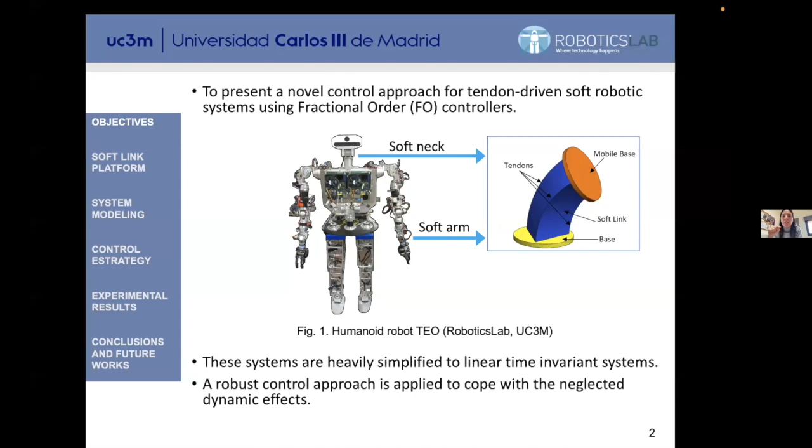So I'm showing you here the evolution of the design, the modeling, and the control of these kinds of joints, right? So the thing is that even if this is a very complex system, we are linearizing it. We are considering it as a linear time invariant system, in order to simplify the model, and then later we will design a very robust control. This is our topic here. And the type of controllers we use are called fractional order controllers. We will see later what they mean, right? So this is the thing.

So what we propose here is this kind of design in which we have clearly an elastic beam that we actuate with the help of 3 tendons, right, connected to motors that we have here in the base. So according to the actuation of the motors, we can change the length of the cables, of the tendons, and it will cause a movement, a change in the orientation and the inclination of the platform. So these elements here that you can see at the tip are to allocate different masses, loads, so that I can measure the robustness of the system when different loads are placed on the tip, right?

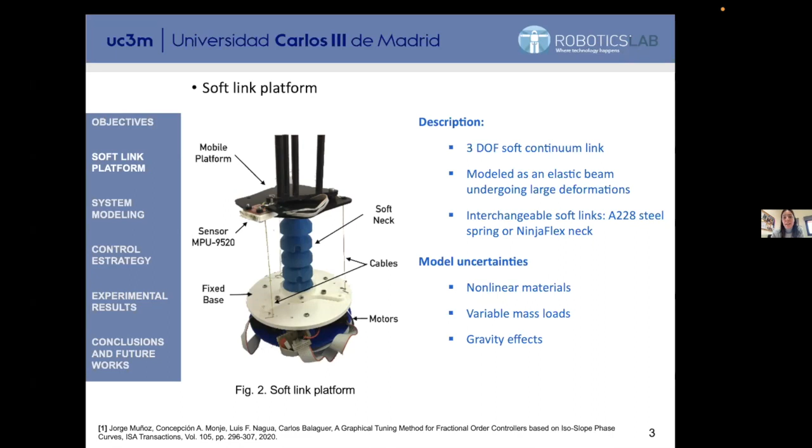This is the idea. So we are working with a 3 degrees of freedom soft continuum link, as you can see here. We, of course, at the very beginning, tried to use steel springs. We forgot about that because they are not really soft. So now we are working with NinjaFlex materials and other materials. Particularly, this prototype is made of, this beam is made of NinjaFlex. And as I told you before, even if the system is non-linear because of the materials, and also because we are adding different loads and we have gravity effects, we are simplifying all this a lot, right? And even if it is a strong simplification, as you will see now, we will see how effective our controllers are, right? And this is the thing we have to remark here.

The control part more than the modeling part. So what we do, just for you to simply understand how we modeled the system, we just simply actuate on one tendon, right, with an input that you can read here, which is a neck inclination. This is a step of inclination for the neck, and this is the input signal to the system. And as output, we measure the neck inclination with a sensor, with an inertia measurement unit, right?

So according to this relationship, output and input, real neck inclination and input inclination, we measure that dynamics and we identify that as a first order system. I understand, I totally agree that this is extremely simple, but this is for us a good thing, because even if the system later is more complex than that, we can demonstrate in practical experiments that the controller works perfectly well, even if it has been tuned for this simple system, right?

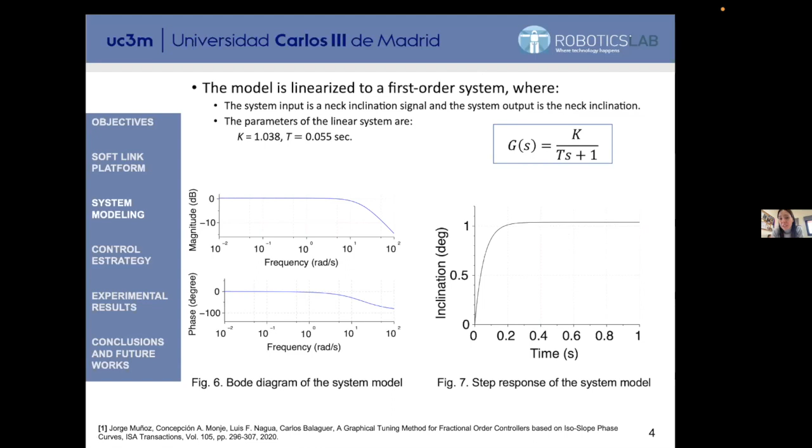We will see. So we identify the system with K and T, a simple first order system, having this Bode diagram in frequency and also this step response. So we can see that for that step of inclination, the neck reaches that particular inclination that we have here, right? So according to this, we design a controller for that simple system. The controller must be robust to certain aspects, mainly changes in the mass of the load. We are using different loads to demonstrate that the controller is able to fulfill stability, but also robustness. And I will describe later what we understand by robustness here, right?

What is the thing here? Of course, if we change the mass at the tip, we are changing the dynamics. This is quite clear, right? But also when the positions of the motors and the pulleys are changed, it implies that the distribution of force and the velocity from the actuators to the soft continuum mechanisms are changing too, right? So we have to take that into account, and also that we are using rapid prototyping here. So we will have some mismatches from one model to the other, right? So we have to design a controller able to face all these mismatches and uncertainties and simplifications we have made.

Right? So for us, we have three main control specifications, as you can read in the slide. First of all, for that neck, which is moving, what I want is for the neck to move at a particular speed, right? Which is a condition that we can fix with the open loop in the frequency domain: the gain crossover frequency, which has to do with the bandwidth of my system, with the speed, and also the phase margin, which also affects the damping of the system, right? So I want it to be that fast. I want this system to be that oscillatory, or with this particular overshoot. These are the two main conditions, right?

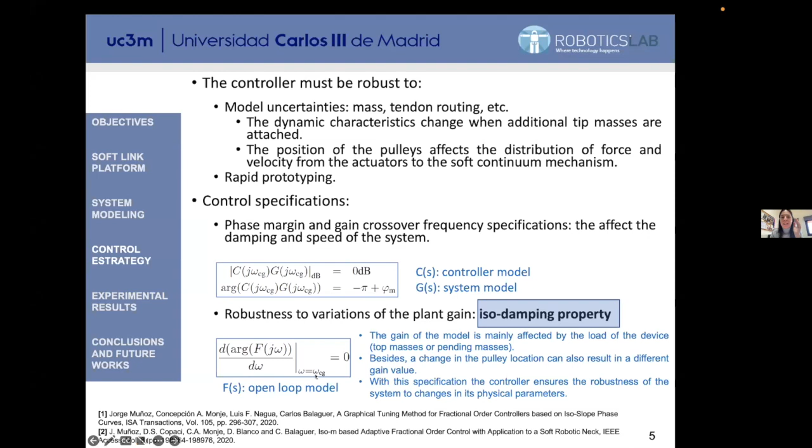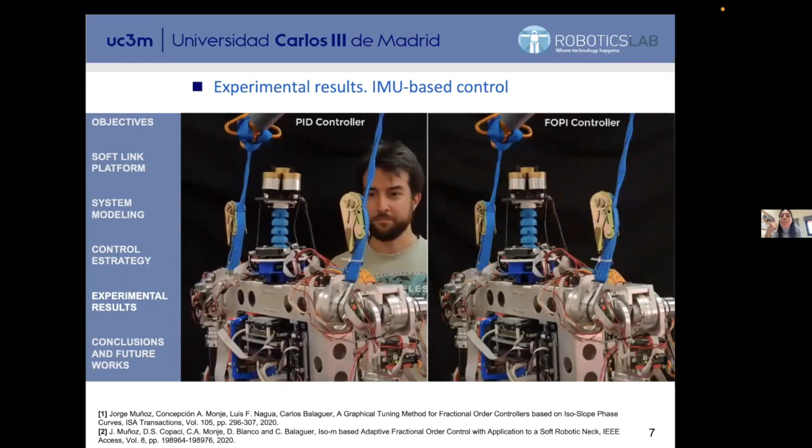So if there is no oscillation, there will not be oscillation for any of the masses I place at the tip. Okay, so here I'm going to cancel a little bit the sound of the video, but at the right you can see how this controller performs. You can see that there are a lot of masses. We have some discs with different masses placed at the head of the robot through the neck. And you can see how the oscillations are totally cancelled, whatever the different mass I place at the tip. And this is the robustness. Of course, we achieved that.

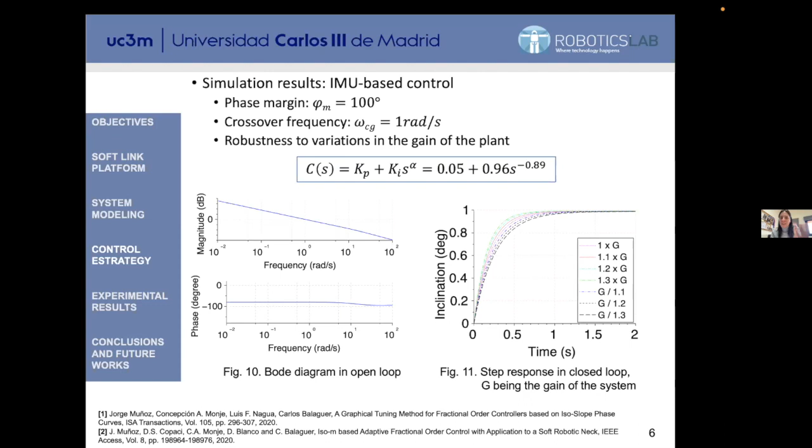I didn't comment on this, but the controller we are using is this fractional order controller. It is like a conventional PI controller, can you see? But the derivative here, which has a negative sign, which means an integrator, is fractional. So we are not using integer orders, but fractional orders of the integrations, and it helps us to achieve this kind of robustness property. Of course, we don't have time to develop all this theory, but these kind of controllers allow us to reach this type of behaviors.

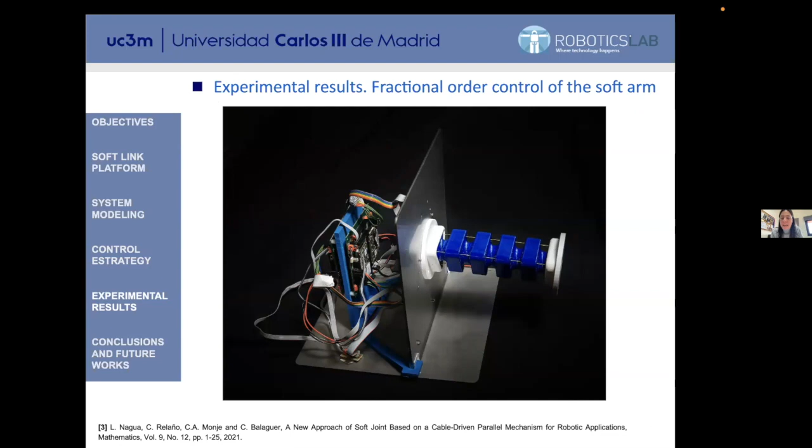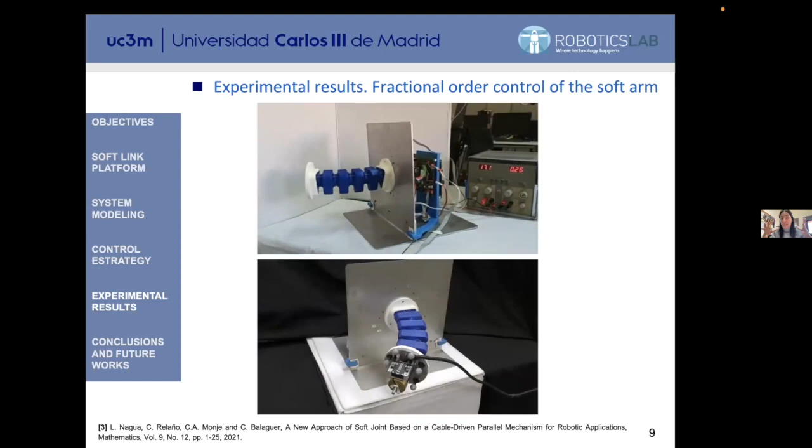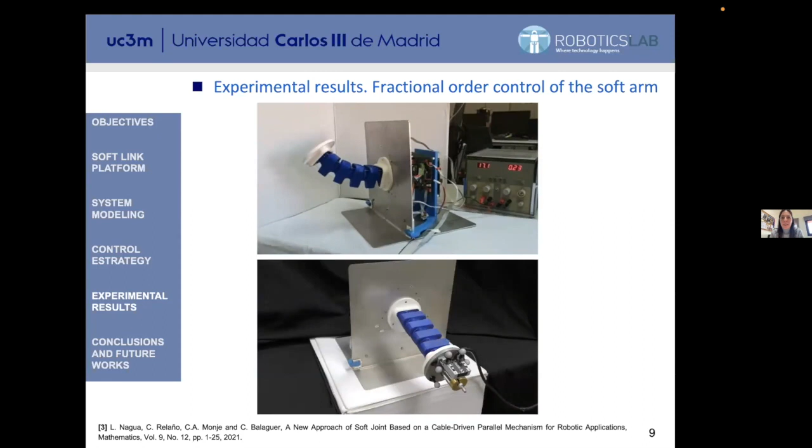And we have also implemented this kind of control, based on the same philosophy, in a new design actuated by tendons. Now we have developed this arm. This is a soft arm, able again to support certain loads at the tip, as you can see in the video at the bottom of the slide. And you can see how now the tendons are inside the structure, so the system itself is safer. And we can reach, with not very powerful motors, amazing bending, I would say. You can see at the top video how this is bending a lot. So we are quite proud of this, and we are under a patenting licensing process of this technology.